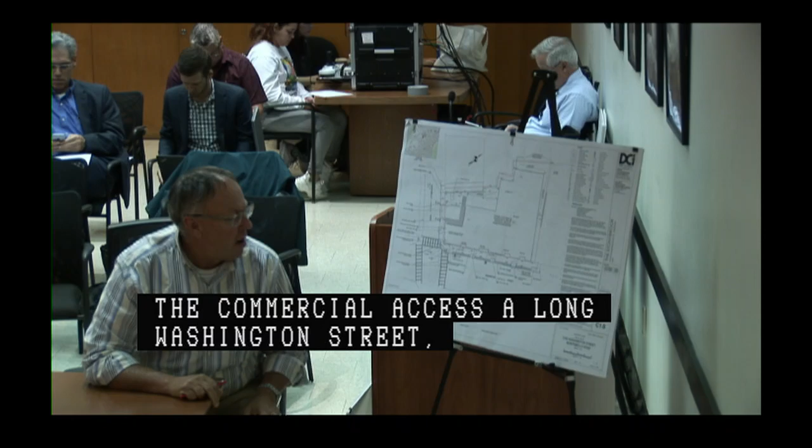The overall project itself is a redevelopment, 46 residential units with commercial on the ground level. There's entrances to the commercial access along Washington Street. There was originally a curb cut on Washington that was closed. So all access to the underground parking is off of Montebello now, from this area here.

In that area where the curb cut was closed, we're providing tree planting with a tree well. There's existing trees where the tree wells will be improved. There is a permeable paver strip along the curb line, back of the curb line. The sidewalks will all be constructed in front of the building.

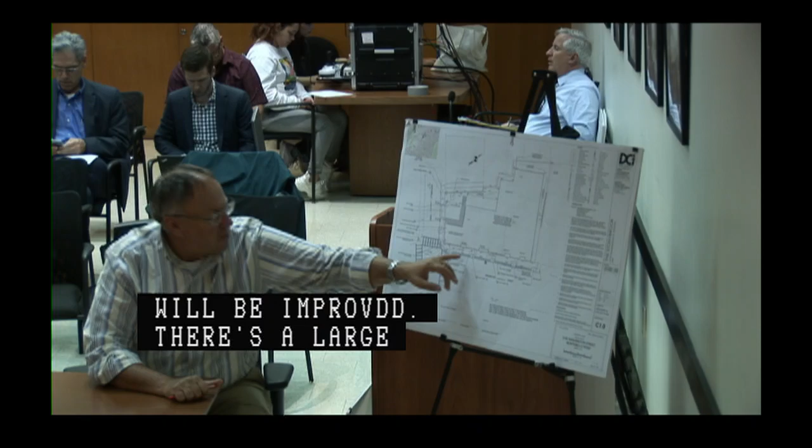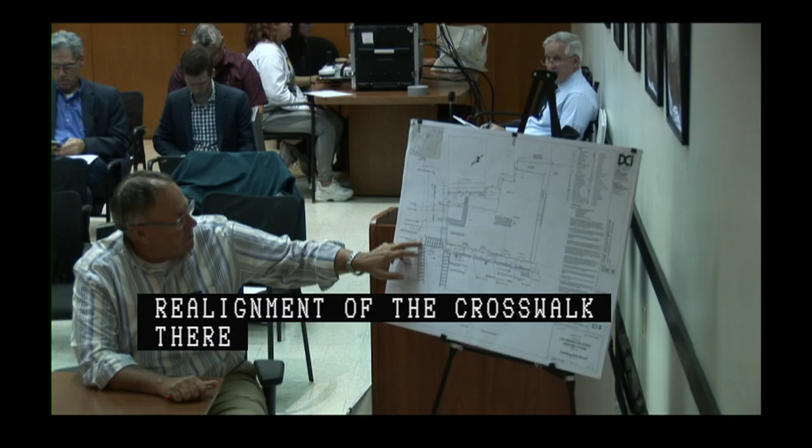At this intersection here, there was an apex ramp. We were asked to separate those, and those have been separated. There's a slight realignment of the crosswalk there to be restriped. The reciprocal ramp here was just recently done with a tactile warning strip, tactile warning pad, and new concrete there.

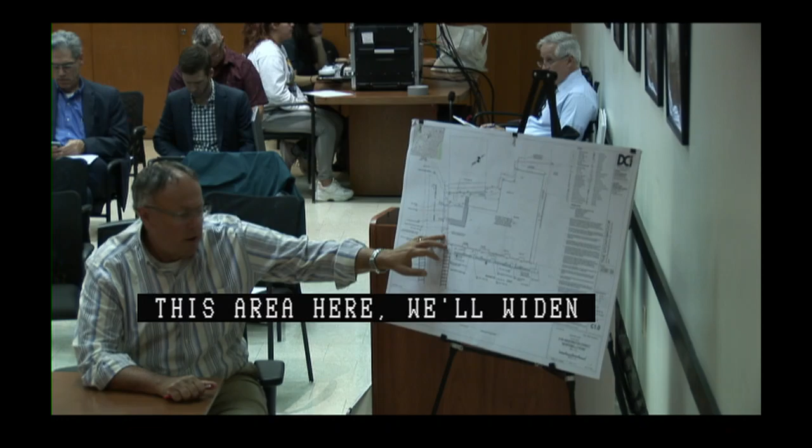This area here, we're widening the sidewalk on Montebello with a new tree planted. BPDA wanted some additional planting, so we're providing a tree here. We're maintaining the 5-foot pedestrian full width behind that tree well, with a 14-foot wide curb cut at this location. And then we match the sidewalk at the property line, on the northwest end of the project site. I think that basically covers the improvements that we're proposing.

Is there an LMI for this? I'm sorry, is there an LMI for this? Yes, there is. There will be. Okay.

Just to confirm, with the existing signal equipment and splitting from the ramps on the corner, there's no conflict with the existing signal equipment with the new ramp locations? So actually, right at this location at the end of the ramp, that's where the mast is, or the ped head is. So there's no encroachment within the threshold? There's no encroachment within the threshold.

Other questions or comments on this specific repair plan? The tree pits, are you putting a tree grate over the tree pit, or is it just an open pit? Open pit. Okay, so you need to ensure, because of the LMI, that it doesn't become a tripping hazard.

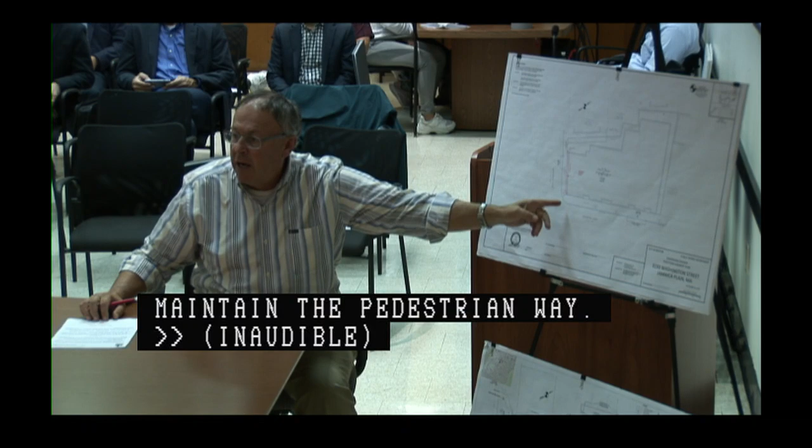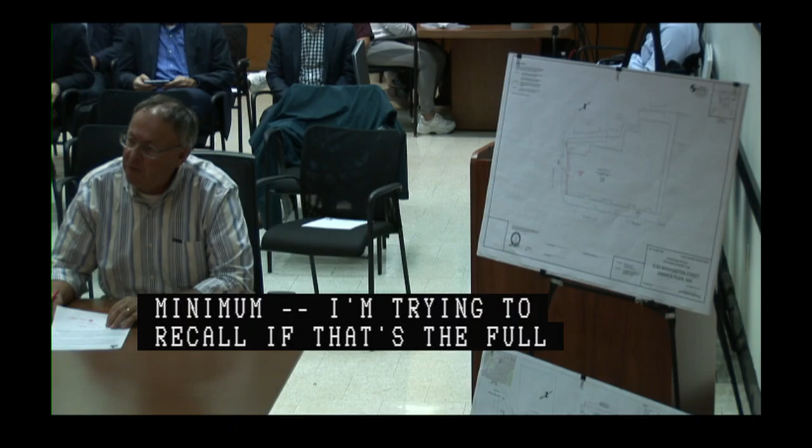Is there any foundation elements of your buildings that comes underneath the easement area? The footing at this, I imagine, is well below grade. The footing may jog out, probably about 12 inches at a minimum. I'm trying to recall if that's a full depth foundation or just at grade, but you'd have a frost wall. So at 3 or 4 feet below grade, the footing might step out a smidge.

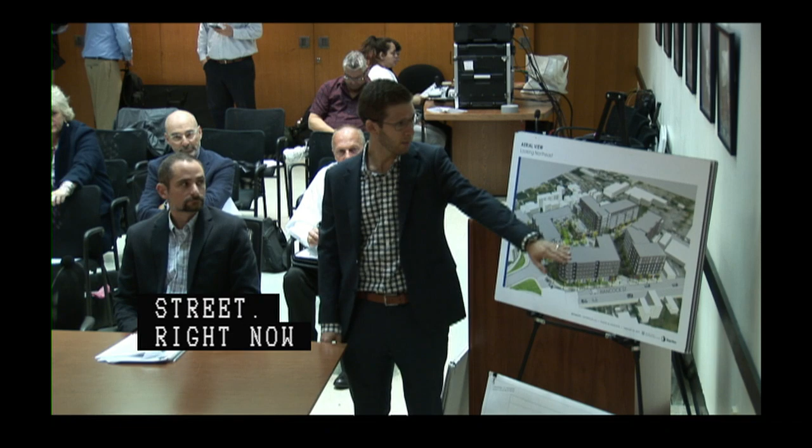As Rebecca mentioned, this is currently a vacant lot. It fronts Dorchester Avenue, Hancock Street, Pleasant Street, and Greenmount. This is 4 buildings comprising a total of 488 units. It has internal drives as well, with a right turn only from Dorchester Avenue and a 2-way drive connecting Hancock around to Pleasant Street. The pieces we'll be talking about today are mostly along Hancock Street and Dorchester Avenue. There are retail spaces along Dorchester Ave and Hancock Street, as well as a little at the intersection of Pleasant and Hancock.

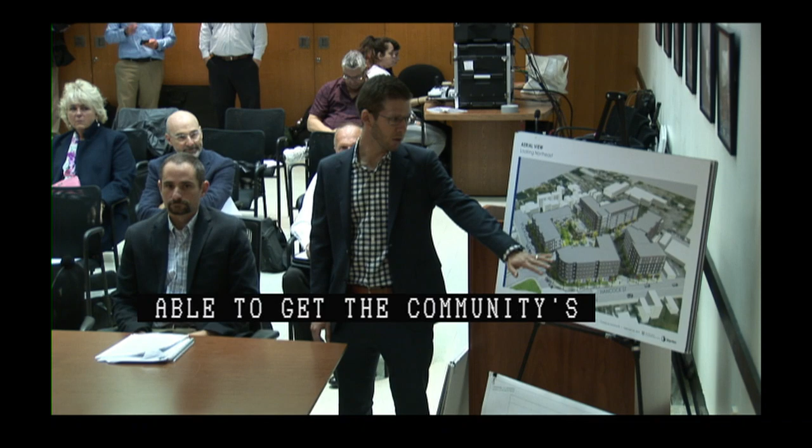For today's record, can you add a couple of sentences as to the community process you have engaged in? I'm sure it's been vibrant and extensive, just a few words on that. Yeah, definitely. We spent months with, I think, over 30 meetings with different community groups from Savin Hill Civic Association, Meeting House Hill, Jones Hill, and Glen Point. We've been able to listen to the community's input and incorporate things such as a community room. We've made a point to really incorporate green space and the pedestrian experience to fit in with the community, and I think they've been very happy with how this has turned out.

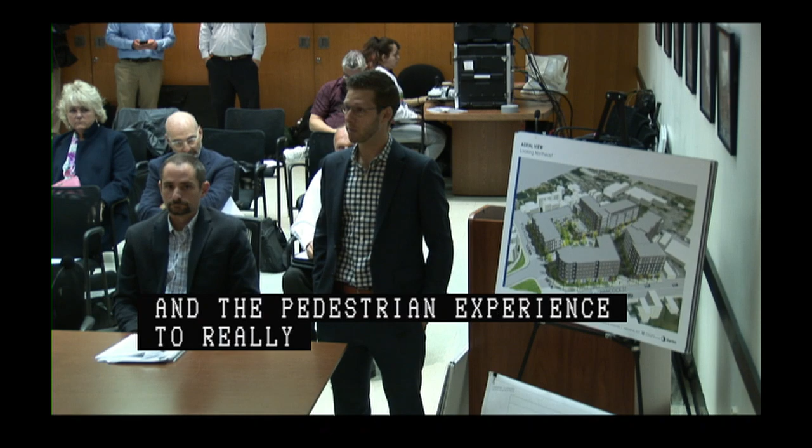Other general questions before getting to the widening relocation? No, let's move to the widening relocation.

The first petition is on the Dorchester Ave widening. There would be an easement granted from the building face to the property line, which is 10 feet in width, and would allow for the future widening of Dorchester Avenue. This is a highway easement, not a pedestrian easement.

Questions or comments on this? Todd? All set. Members of the public?

All right, I'll entertain a motion on the widening and relocation. I'll make a motion to approve the petition by Winter Gold LLC for the widening and relocation of the existing right-of-way lines at Dorchester Avenue, as entered in the record by the chair and as shown in the set of plans entitled City of Boston Public Works Department, Engineering Division, Widening Relocation Plan, dot block, Dorchester Avenue, Dorchester, one sheet dated September 6, 2019. All in favor?

Aye. So moved. Moving on to our next item, a petition by Winter Gold LLC for the acceptance of pedestrian easements adjacent to the following public ways in Dorchester: Hancock Street on its northeasterly side, generally between Dorchester Avenue and Pleasant Street / Downer Square; Pleasant Street on its easterly side, generally between Greenmount Street and Hancock Street, Downer Square; and Greenmount Street on its southwesterly side, southeast of Pleasant Street.

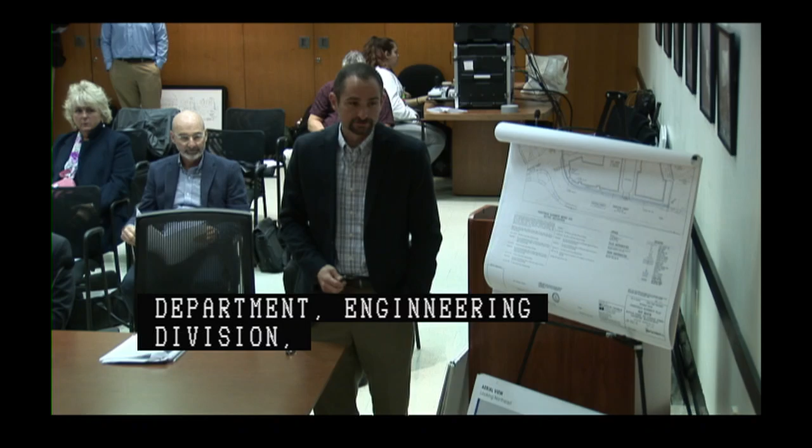Again, Jeff Halberg, representing Winter Gold LLC for the dot block project. The pedestrian easement here is located along Hancock Street, turning the corner towards Pleasant. Again, this is to allow future movements along this stretch. There are 3 sheets associated with this improvement, going from Hancock to Pleasant Street, turning the corner. It's a variable width, so it allows for adequate space as the curb line moves, and then it turns to Greenmount as well along the stretch here.

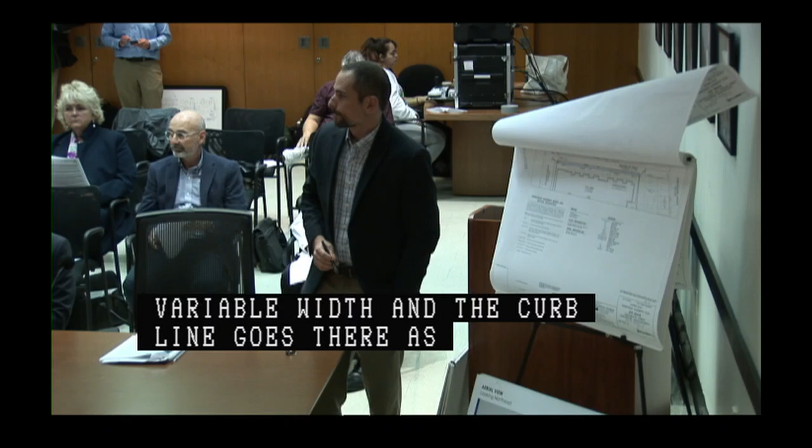All of the buildings have been set back from the property line. This is a formerly industrial commercial site, so to allow for a much more pleasant pedestrian experience, recognizing that this block is a transition block that will be a place-making location in terms of new residential, all the streetscapes envelop the entire building. We've arranged, in collaboration with BTD, Public Works, PIC staff, and BPDA, for the widening of the sidewalks all around the property.

And those get to the specific repairs, but what's going to be the resulting sidewalk width around the property, and how much will be sort of more for landscaping and furnishing? It'll be a 6-foot wide sidewalk, 10 feet total including the furnishing zone and curb line. So 3.5 feet for the furnishing zone, 6 inches for the curb line, plus the sidewalk.

Are there any activities on your ground floor that might require more of a commercial nature, like a restaurant type, or sidewalk access? Not on Greenmount Street, no. Greenmount is more of a residential neighborhood. Hancock will have it, but it'll be within the Dorchester Avenue property line. The building on Hancock Street is set far enough away from Hancock Street that if there's a cafe zone, it'll be on the private property.

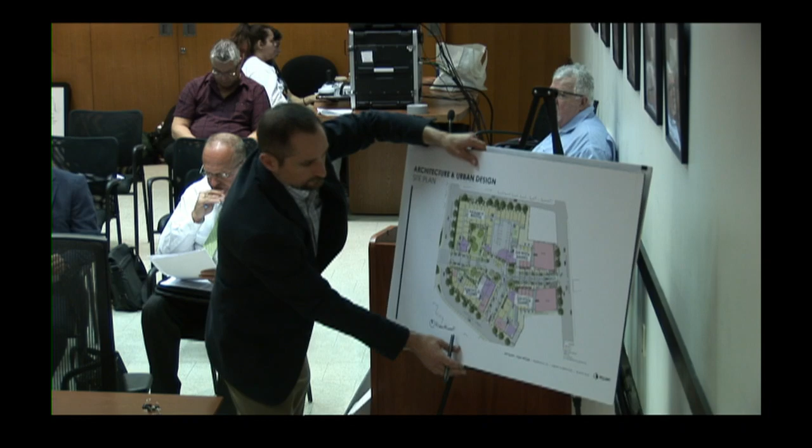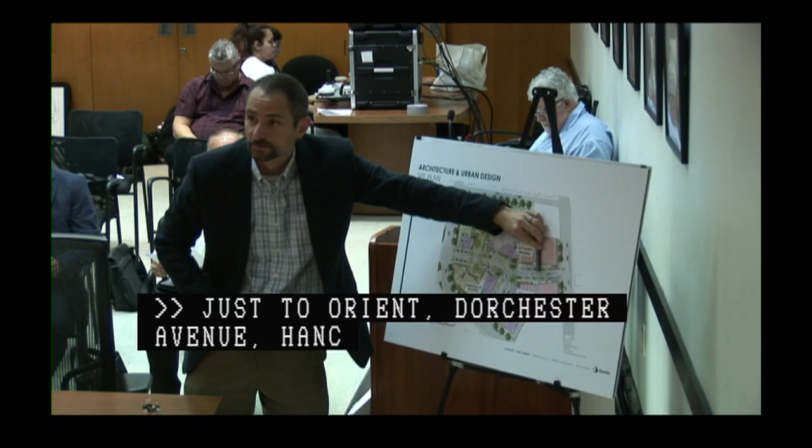So internal to the site, just to orient, Dorchester Ave along this side here, Greenmount, Pleasant, Hancock. The passageways, sidewalks run along with the interior access roadways. We have this one-way in. We're calling this the Downer area, which will be a plaza that's pedestrian-friendly. Cars are welcome or permitted, but it's more for... give me a second.

Todd, are those private property? Private properties, their driveways, they are not laid out or anything, but you will have people coming out. I mean, these are pedestrian paths, right? Yes, correct, they will be properly lit, all the lighting standards. But the key is that while cars can make a right turn in, they will not be able to exit the site onto Dorchester Avenue, and that will limit the number of vehicles that will actually use that. But there are generous sidewalks on either side of the cartway on that private drive that comes off of Dorchester Avenue, and there is street lighting. The buildings will also have some external lighting as well.

From a public transportation perspective, especially whichever street that is going north-south, is there a bus stop on the other side which will cause people to cross that location? Well, there's a signalized intersection located here at where Hancock meets Dorchester Ave. But if I ask you where's the closest bus stop, where is the bus stop?

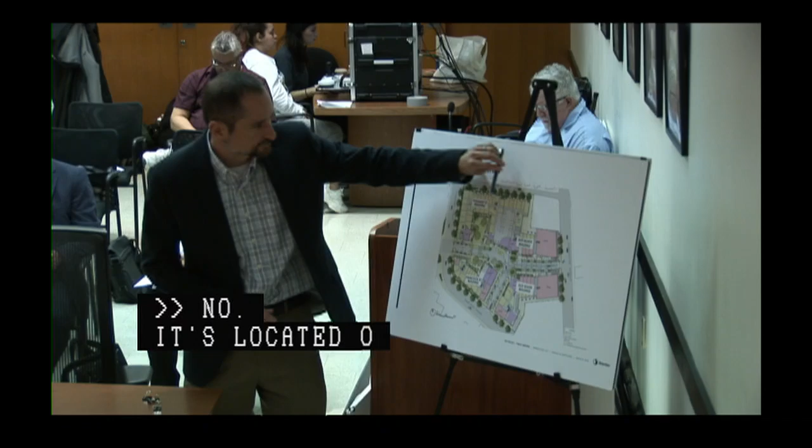One of the questions I also have with that plan, the loading for the five buildings, will that be done in the internal cartways? Not all the loading, no. There's loading located off of Hancock Street, and we also have some off of Greenmount. But it's on the property, yes, the loading would be occurring on the property, so nothing is occurring on the street. Thank you.

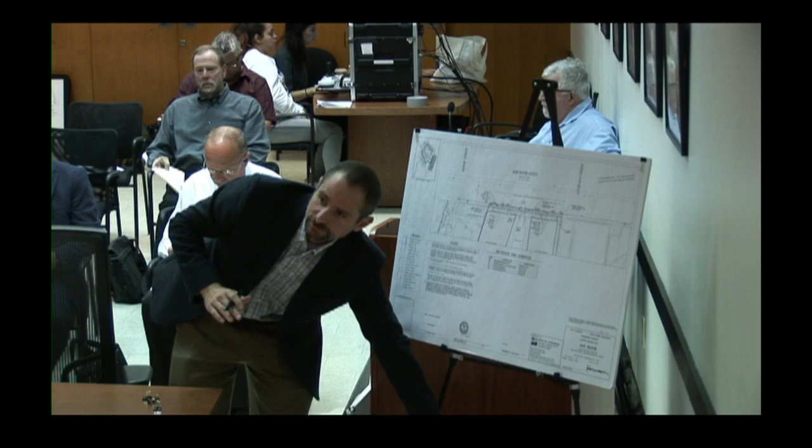And we went into this last time, but it is a flush sort of sidewalk condition on Dot Ave, is that right, for pedestrians walking? Yes, for pedestrians walking in the direction of travel. Right, it would be a flush condition, correct?

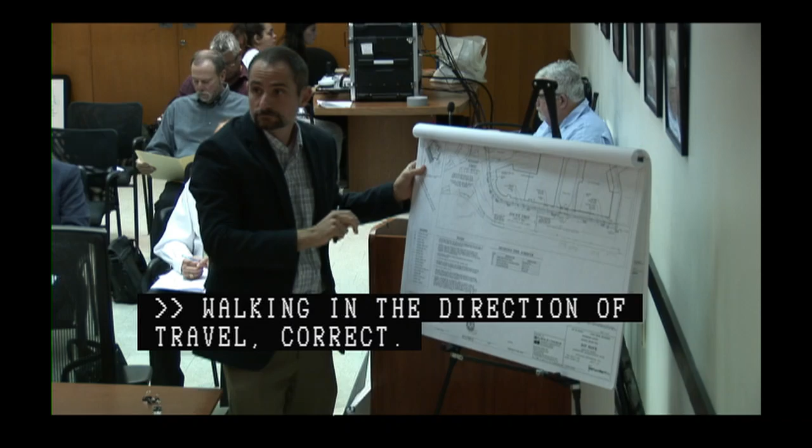What about the street light fixtures, have you thought about that? Yeah, is it going through the same old stuff that might be there, or have they coordinated all that, including the types, with the street lighting division?

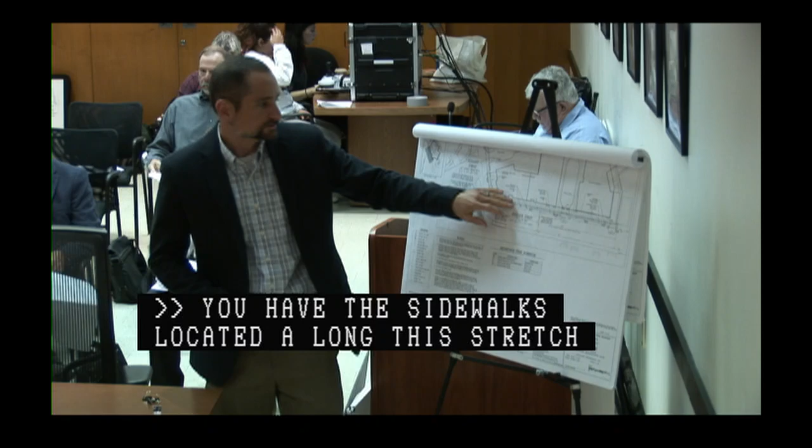On Hancock, we have similar specific repairs. We have concrete sidewalks located along this stretch, along with granite curbing, bike racks, and treatments as well. This same condition occurs as you wrap the corner, where we have accessible curb ramps located along.

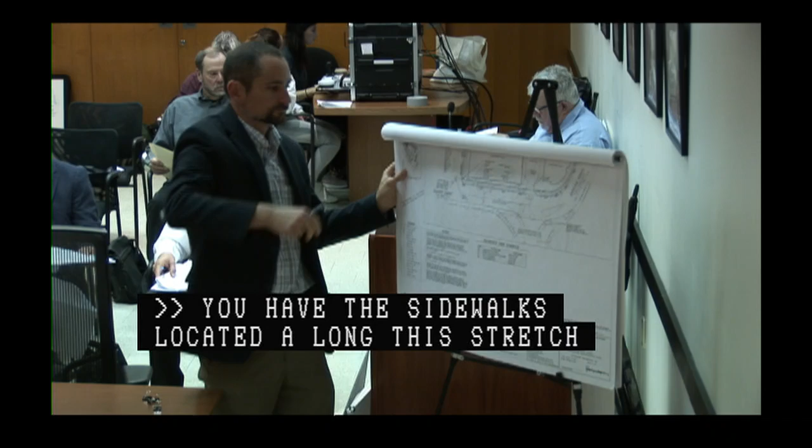Continuing across, now we're heading to Greenmount. Greenmount is a little bit of a different condition than on Pleasant and Hancock, in that the streetscape will actually be on private property. They won't be within the public way, so that's not included on the specific repairs.

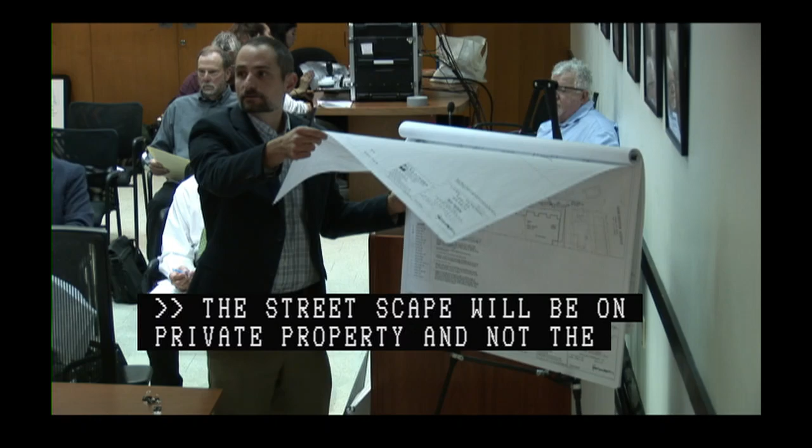Sorry, quick question, Mitch. So it's also a flush sort of entrance off of Hancock Street, but if I recall correctly, not off of Pleasant. That's correct. So at this location, it is not a flush curb condition as you're in the path of travel. So there's a ramp though, pedestrian ramps that go across that. Exactly, yes.

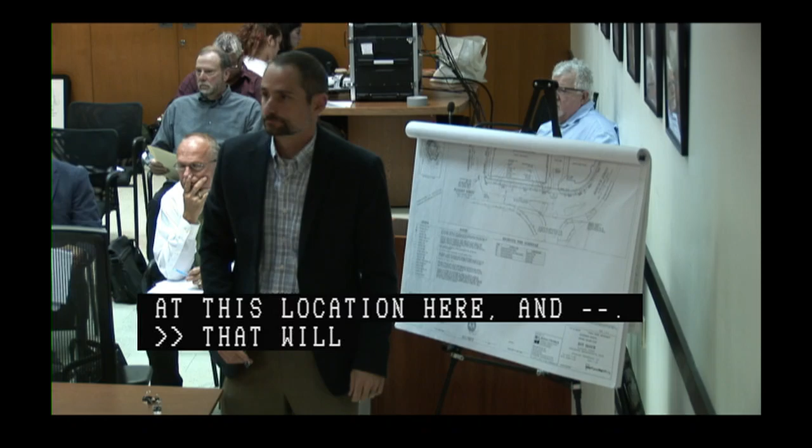On Greenmount, we have streetlights, concrete curb, granite curbing, concrete sidewalks, and then the street trees are pushed off.

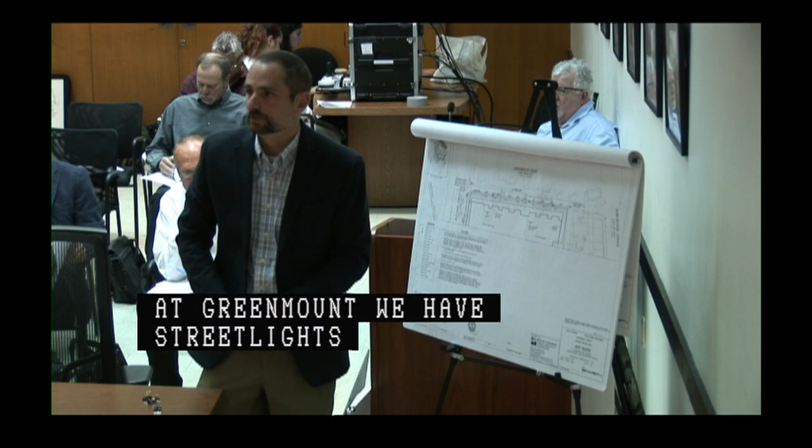Can you walk us through the work you're doing to bring out the curb line at Pleasant and the western entrance to your property, on the opposite side of your property?

So this hasn't been fully designed yet, we're showing it on the plan. We're showing these bump outs to create a more channelized intersection. This will be a signalized intersection, and for that reason we are continuing this sidewalk with an accessible curb ramp on both sides to allow for pedestrian travel.

That's a future action. The status of design is that 25% design comments were provided. The 75% design is underway and expected to be submitted to BTD by the end of November for review by the new director of engineering at BTD. So we will be before you on PIC actions depending on the final completion of city review and agreement as to how the public sidewalk should work, and we will be before you both for specific repairs and a related maintenance agreement to maintain those areas, whether green or hardscape.

Great. Rebecca, that future traffic signal, is it going to be installed by you? The proponent, yeah, it is a mitigation obligation we inherited as part of acquiring the project site. It was the city's decision to have a signalized intersection; there were some earlier discussions about a roundabout. It's being designed by HSH, it's embedded in the TAPA under BTD review, and it's our obligation to get that constructed and operating and come online by the time the project is open for occupancy. Then the signal will be owned and operated by BTD.

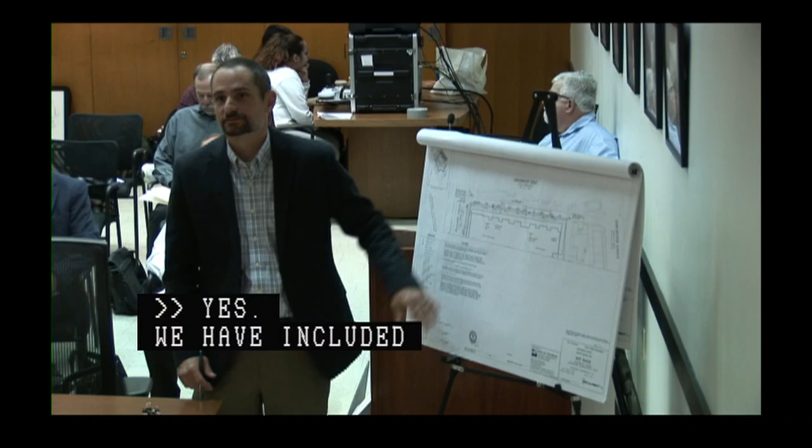We also want to reiterate, as brought up at the last meeting, that there's a 72-inch pipe within the limit of work, and we have the right to be there at any time if something happens. Yes, we've included the location of that on this plan, showing the 72-inch line throughout the site. There's also an easement agreement being reviewed by Jim Seincross that addresses that drain pipe and your rights of access to it.

Thank you. You're welcome, Miss Lee, sorry, Rebecca. All your support utilities that are needed, telecommunications, I will get to the telecoms later.

So all your water, sewer, gas, juice, all of those things - do you have understandings with the various utility companies to supply those needs, or are they supposed to upgrade their stuff to provide feeds to you? Let's just take gas - National Grid, I'm assuming, in this part of the city. Have you had conversations with them about supplying your needs? Because sometimes these conversations aren't complementary, and these utility companies come at the 11th hour, before or after you're done, or somewhere in between, to dig up our streets, and then our streets get torn up trying to serve you, which puts us in an awkward position. So do we have an understanding of where you're getting all your utility connections?

These are our standard stuff. This is an underground district, so there better not be any overhead wires. Are there? Got it, okay.

So the other challenge is all the telecommunication companies who may suddenly want to give 5G service to your area. What is the level of interaction with those entities? Have you had conversations with them? Absolutely, yes. We've been coordinating with utility companies for probably almost a year now on locations and demands. We have will-serve letters from them, because it would be very problematic if there are multiple ways of providing access to you versus them saying they're trying to support a 500 unit development project and then digging up half a mile of streets just to get you a lateral connection. Yes, and we've been discussing pull-off locations for gas and communications to limit disruption within Dorchester Ave as well, so we've been having these conversations with the companies.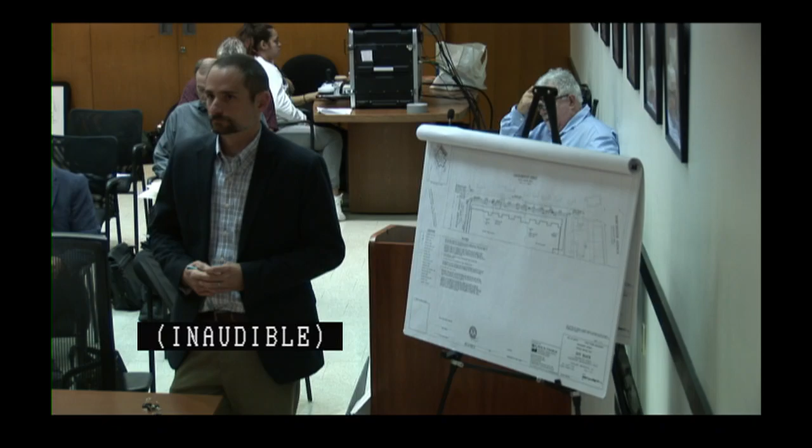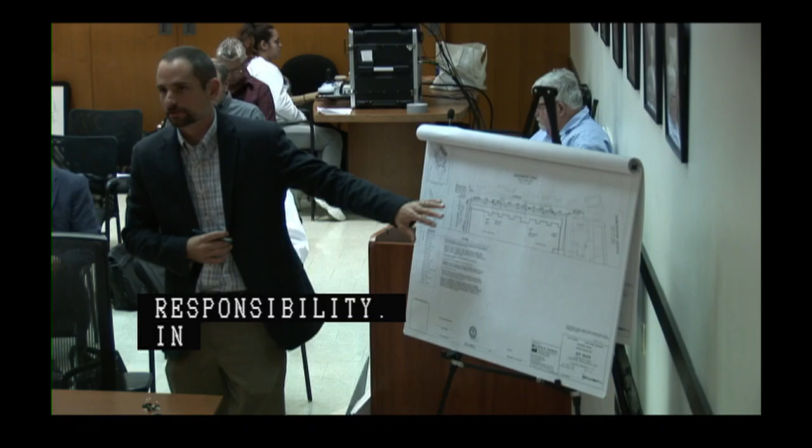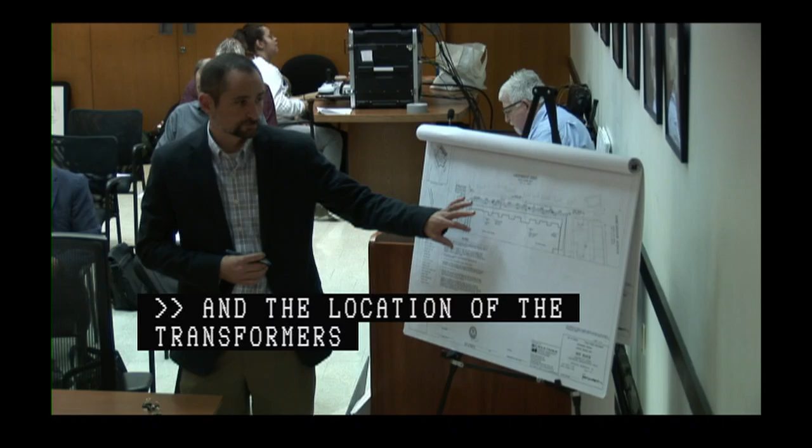How about Eversource? Are you building any of their infrastructure, or will it be your infrastructure as part of the power requirements of the building? Normally, they will be building the infrastructure to the transformer. It's our responsibility to take that power from that point, and interior to the site, we would be installing all of that. And the location of the transformer - sometimes we get tagged with putting the transformer on city property. We're showing our transformer locations within the interior of the site, all within the interior.

So that brings up Para's point - a lot of the coordination issues that become a real headache are the utilities as they pertain to the construction management plan, the temporary power, permanent power, gas. That needs to be figured out in your CMP, because I'm not going to allow that activity amongst the active construction work site taking place on the city right of way. Right, and when I said they're doing work, I mean they would be pulling the wires, and we would be doing the installation of the conduits.

Yes, they own it. So in response to this back and forth, we can revisit with each utility company their construction timing, scheduling, and staging, and revisit our CMP to make sure that's anticipated within what we're showing. If there are deviations requiring street openings, we'll show and discuss that when we discuss a revised CMP. So we'll literally go back to the drawing boards and figure that all out.

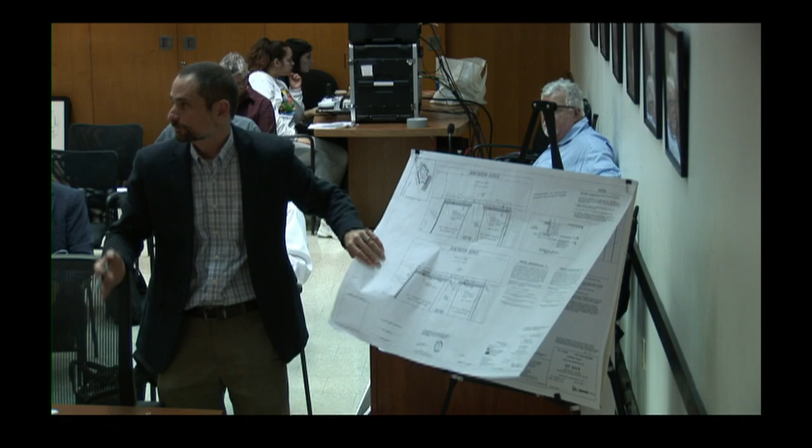So we're showing here the location of that easement that we're granting and then the vertical discontinuance for this footing. In addition to this, as a comment, we received word that the architectural trim located on the building itself does project out within this area. And so the current thing we were showing on the projection plan, upon further discussion, should be shown on this plan instead.

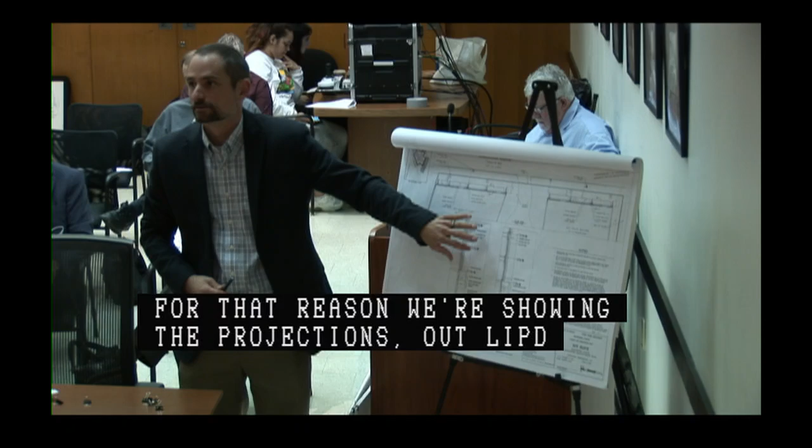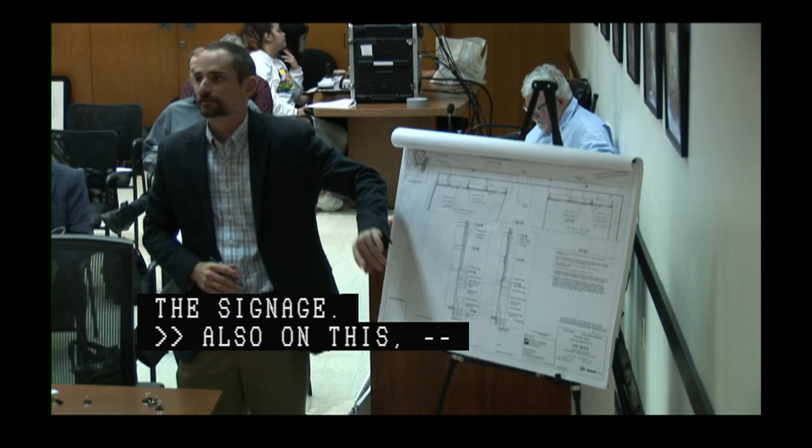Jeff, also on this, or at least on what we're seeing, the facade trim, correct me if I'm wrong, we are moving. Correct, so it will be deleted from here, the architectural trim will be deleted from this plan and inserted onto the vertical discontinuance.

Questions or comments on the projection license? Again, for the record, Greg, you work for Samuels Associates? Yes. What's your relationship with the developer? We are the developer. The owner is Winter Gold LLC, so we are developing for the ownership of Winter Gold. And we have them on record as being the representative for the developer? Yes, and we have signed petitions by Winter Gold LLC.

Okay, thank you. Could you put that up, just want to get a little understanding of the awnings you're proposing, what height, what length, what depth? The awnings. Yep, the picture of the awnings.

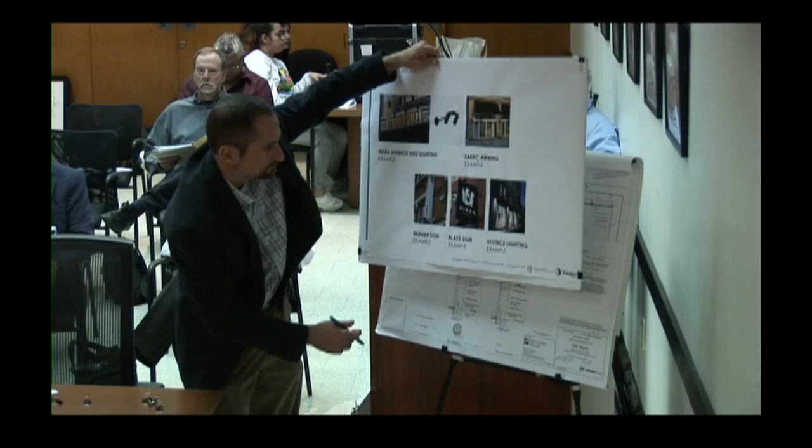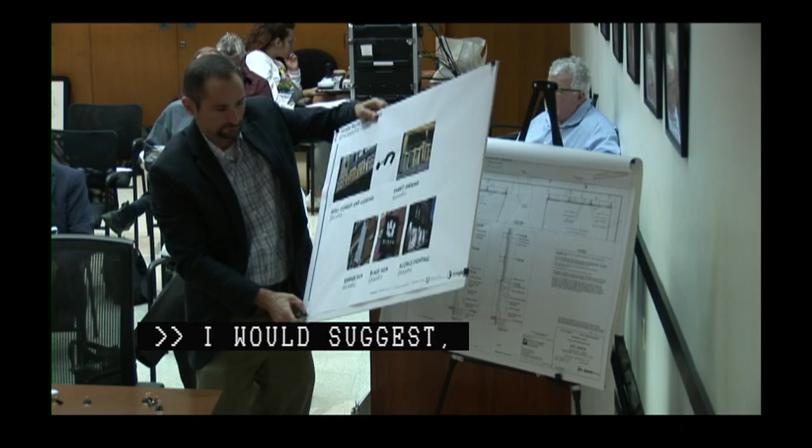I would suggest fabric awnings, that's about it, but beyond that, at the moment, Jeff, maybe put up the image in the package, the Dorchester Avenue corridor image, that's where the money shots are. Exactly, we have an image of that shot, what we are proposing. Correct, not taking 10 steps backwards.

Exactly. So facing. Yeah, obviously we don't have the identified tenants at the moment, and the notion here is that we'd like to give the tenants some flexibility within bounds to identify themselves and also unify the project across the ground plane and the first 15 feet or so. The awnings would be intended to be between the piers, and then at the piers, the notion of maybe blade signs and other kinds of identity and lighting, sconces along the wall, things that make retail corridors friendly, well-lit, and safe.

Right, so as long as there's an understanding that we are not giving you carte blanche, a blank sheet, as to the type of verbiage and signage that can be there, okay? Because you are giving us very general kind of requests, and we want to be mindful.

This action is really just identifying the locations and dimensions of the building projections, and the project understands that they're going to have to go through actual design review for these projections once tenants have been identified. Who takes care of it? Is it BPDA? Yeah, okay. So BPDA through the buildings department will sort that out? That's correct.

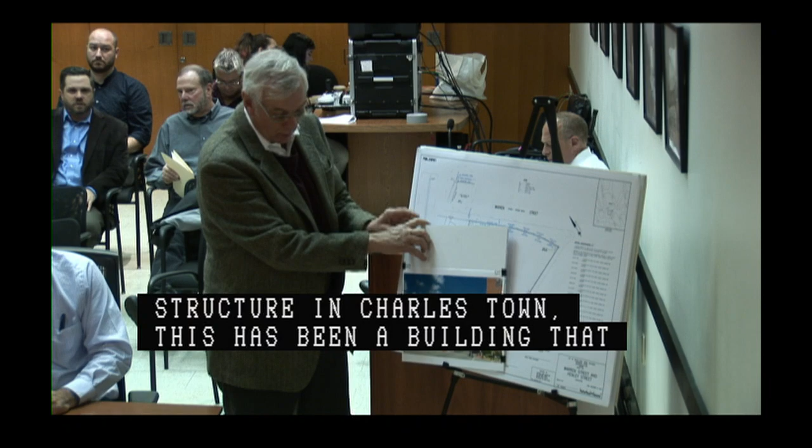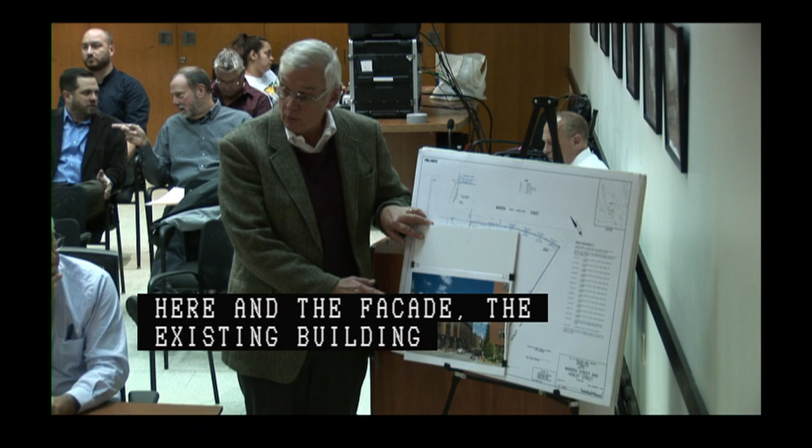This is the renovation of an existing structure in Charlestown, close to City Square. This building has not had a lot of improvements for many years. It was built as a parking garage in 2 phases around 1920, and the renovation is to the interiors to create additional office space, as well as to add a 4th floor. For the facade, the existing building is a poured-in-place concrete parking garage, which was built right on the property line, the street line, at the back of the sidewalk.

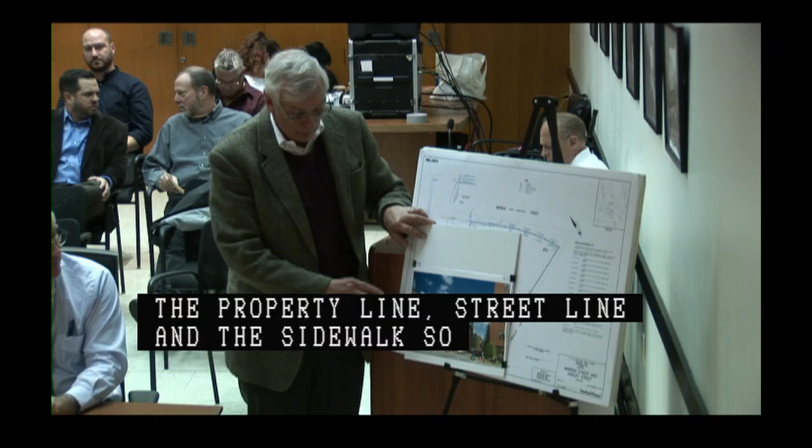So to install the new brick facade to blend with the rest of the City Square Charlestown neighborhood, we're requesting that a small permanent strip of land along the Henley Street side and the Warren Street side be dedicated to this property so that the facade can go down to the ground in front of the existing building.

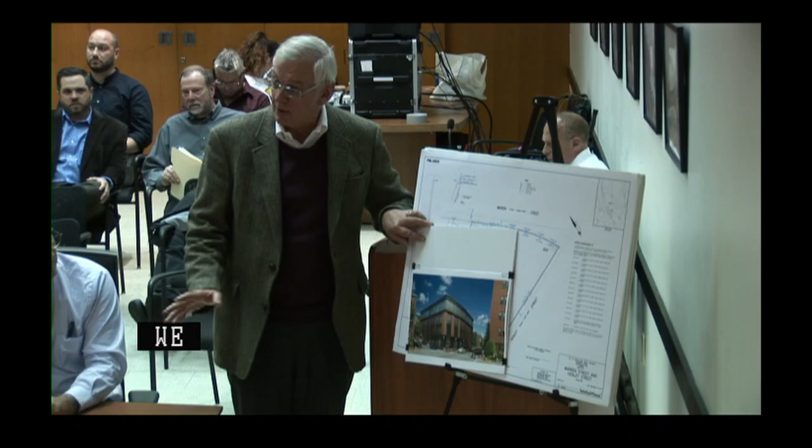Got it, that's really the overview of the building itself. In terms of the street improvements or specific repairs, we're maintaining the brick sidewalk along Warren Street, and the concrete sidewalk along Henley Street on the slope. We're also maintaining all of the existing street lights. We're not adding any landscaping or other street improvements to the project.

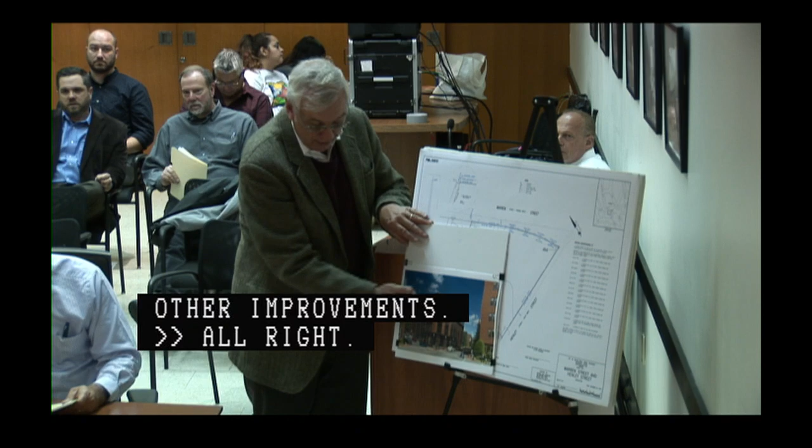Right, and I apologize, Mike, what is the current use and what will the future use be? Current use was a mix of office space on the 3rd floor, parking garage on the 1st and 2nd floors, and some retail. The new building will still have those same uses, but with more office space. Parking garage will just be on the 1st floor, and the retail area will be expanded at the corner of the 2 streets.

Do you want to walk us through the actions?

The first issue is associated with the discontinuance related to the building facade. It would be 0.75 feet along the Warren Street frontage and about 0.35 feet along Henley Street. The area totals about 136 square feet.

Is this a surface or a subsurface discontinuance? Surface. So there's a surface discontinuance for the building facade, and they also have additional aerial vertical discontinuances for building projections.

Reason? So you're basically taking 3/4 of a foot off our sidewalk. Yes. For what purpose? Because this building is there and you want to improve the facade, since sidewalk widths are not the greatest in Charlestown, challenged as it is right now. As Mr. Vidal mentioned, it's to improve the facade of the building so it has continuity with the existing City Square buildings.

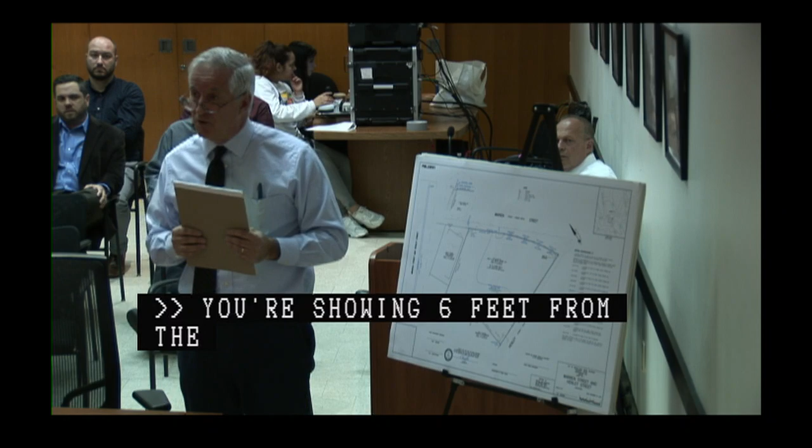On the specific repair plan, you're showing 6 feet from the curb edge to the building face. Is that after the discontinuance? That's after, yes. You'll have a minimum 6-foot width along Warren Street after the building facade is installed. And you're proposing removing about 3/4 of a foot on Warren Street, just on that side. On the Henley Street side, it's much less - that sidewalk is narrow to begin with.

So is the city council involved? The value of the discontinuance - the petitioner owns the fee in this land, so there's no BPDA taking. However, they are going to conduct an appraisal, and they will be compensating the city for the discontinuances. They've been working on that appraisal, and it's close to being done, is my understanding.

Other questions on the discontinuance? I just have a question - recently, as of this past week, there's been some Eversource transformer work. Is that part of your project? As far as off of Henley Street, there's some transformer work going on to relocate and put in a new transformer. Is that for the building? It's part of this building, yes, because of the renovations going on. Eversource said they wanted to put in a new transformer.

The previous transformer was put in in the 1980s when just the third floor was office space. And that's on your property? No, it's an easement on the neighboring property, and it's also connected to the neighboring building, so it's not just serving this building, it's serving the neighboring building as well. So, just do me a favor, let Eversource know they're not working under your permit - they need to pull their own permit for that work. Specifically, I think we're going to have a crane out there this weekend, so that needs to be pulled. All right? Yes, thanks.

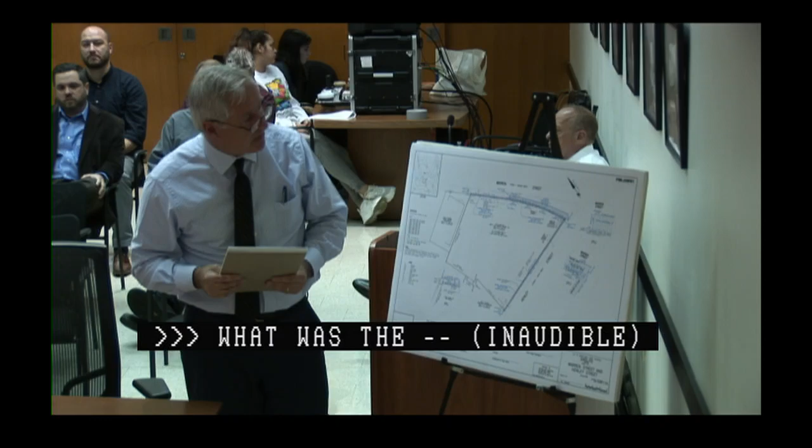It's identified as a width of - I'm sorry sir, I'm having difficulty hearing you. I'm sorry, you were saying it's for a roof cornice - so these, you're speaking of the discontinuances. Yep, my apologies. Yeah, it's about a foot in width along Warren Street and Henley Street, at the roof level. Totals about 312 square feet in area.

This is further discontinuance B, proposed for a canopy along Warren Street that turns the corner on Henley Street. Along Warren Street, it's 4 feet in width, the canopy, and along Henley Street, it's 1 foot. That discontinuance totals about 436 square feet.

The resulting sidewalk width is going to be 6 feet - you're going to have 4 and change be a canopy. How does that line up with our standards? So our typical maximum is 2/3 the width of the sidewalk. At what height? So it is 12 feet above - about 12 and a half feet above the sidewalk level. At the lowest point, it's a little over 10 feet at the upper part of Henley Street, but that's only a 1 foot projection, only the short section.

This street is sloping down. So on the plan you have there, it's showing, on the northeast corner, that it comes out about 4 feet - sorry, to your left, closer to you. This side? You got it. So that's looking at about 4 feet and 4 inches, roughly, which would be going beyond the 2/3. It's 4 feet - the sidewalk itself is much wider along part of Warren Street. Okay, so we're looking at less than 2/3 at any point.

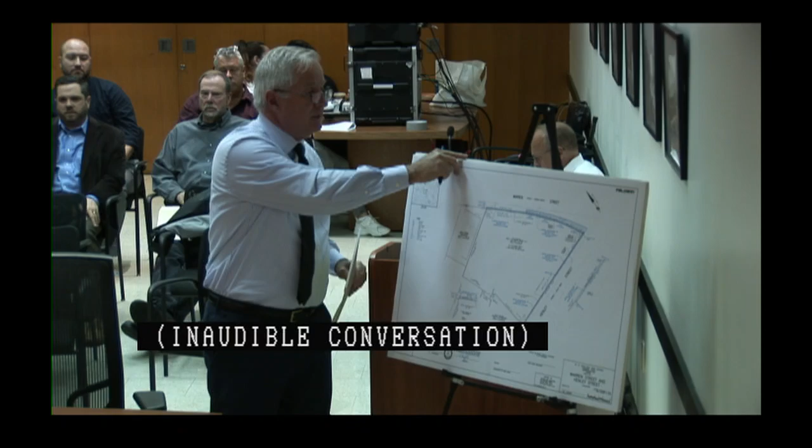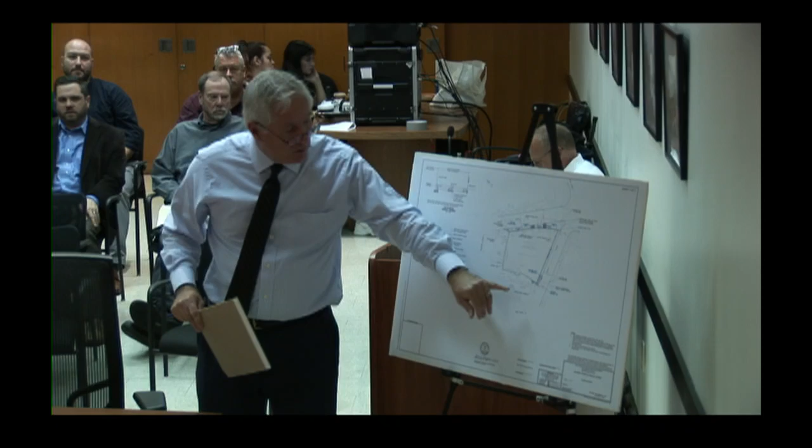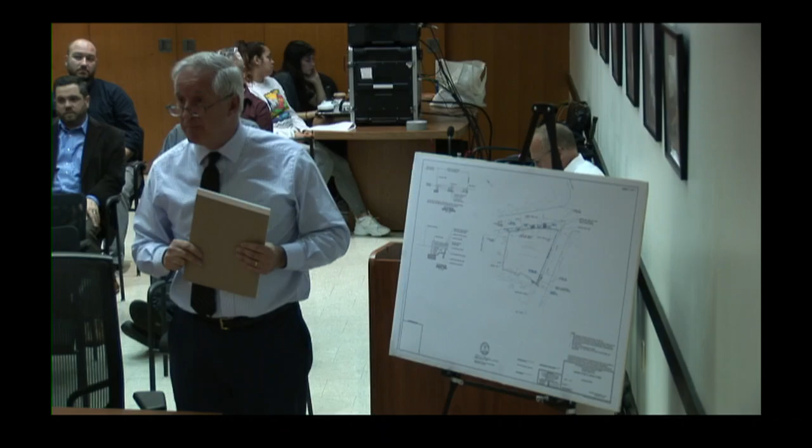Hopefully I'm not overstating the situation, but I am of the opinion - I may be wrong - that by the time you do this wonderful project, the sidewalks around your building are going to get impacted in an awkward way. So it may be in your best interest to plan on rebuilding the whole sidewalk, unless that's what you're already saying and I'm just not hearing it. Are you rebuilding the whole sidewalks?

No, we weren't. I am fairly certain that your contractor - not you, sir - may have difficulty hopscotching and not disturbing the whole sidewalk. So it might be in your best interest to do what is sensible, because there will be damage by your contractor to our sidewalks by the time you build that wonderful project. It might be useful for you to plan ahead, assuming the whole sidewalk needs to be rebuilt.

That's one. Two, as far as what the materials are, the city team will give you guidance, because some parts of our city fall under historic neighborhoods - historic commissions, historic districts - and they will tell us whether it's going to be brick, concrete, or whatever it is. So we will give you that guidance.

It may be a better step on your part to follow up on that with the commissioner on the construction management plan, because the building is zero lot line - we've closed all the sidewalks, all the crane work, all the lift work is off the public sidewalks and roadway. More to the commissioner's request.

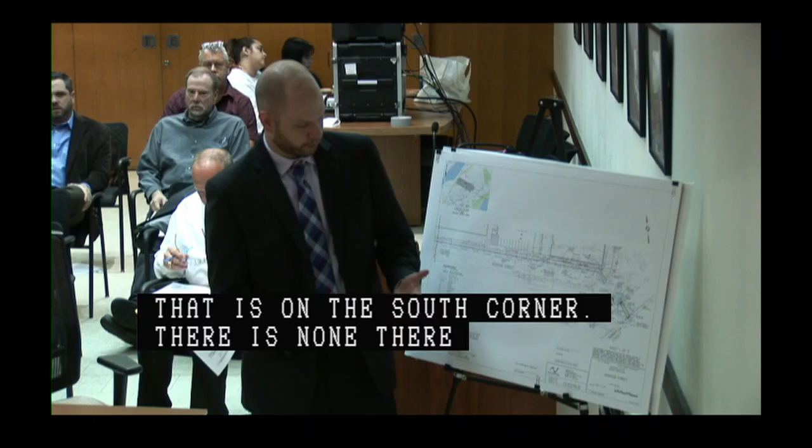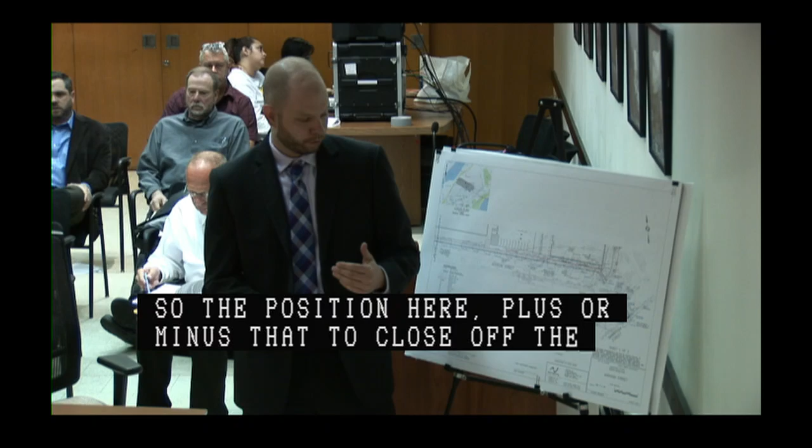So the proposed condition here is basically to put in the raised crosswalk. We'll add a 6-inch curb, plus or minus, around those corners to close off the existing apex ramps. And then we want to provide a better crossing, an apex ramp across Saratoga Street.

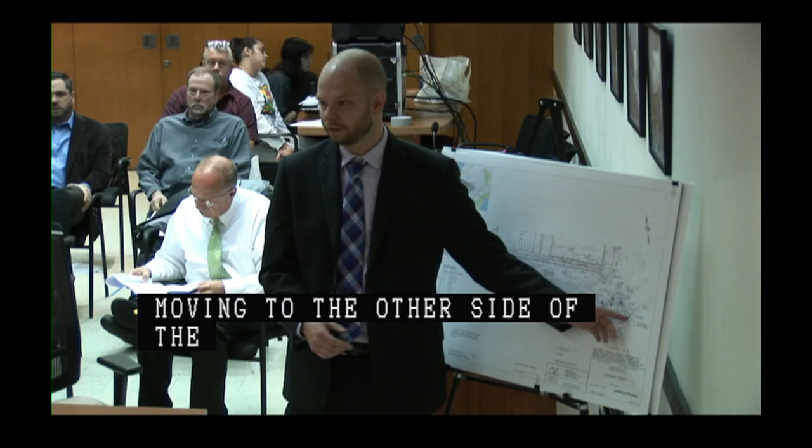So we can't provide that on the south side because of the existing catch basin - the ramp would be right on top of it. So we're proposing to move it to the other side of the street, maintain the single crossing, and that way we can get a straight ramp going across, and add a new reciprocal ramp on the other side. Got it. Sorry, Chris, I know you just said this, but you'll basically still have only one crossing of Saratoga.

You're just moving it from the southern side to the northern side. Yes. And you're going through a community process around that as well - that's part of the overall community conversation. Yeah.

So then, moving westward along Addison Street, this is our project site, kind of sandwiched in the middle. The edge of our site is right here on this page. So in front of our site, there's a large 37-foot driveway existing.

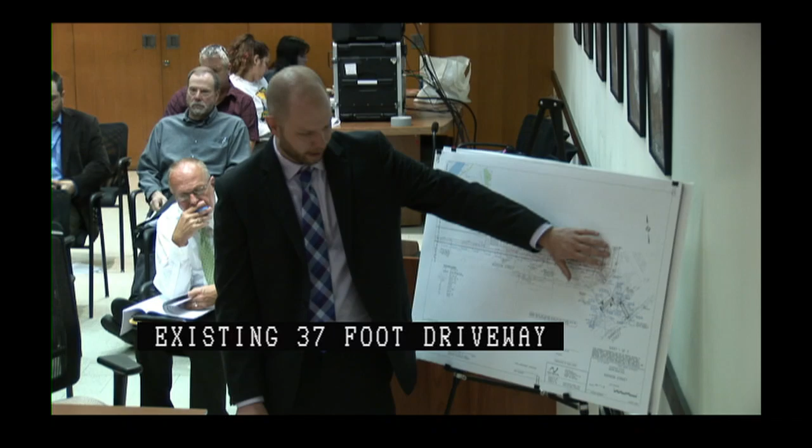We're proposing to close that and put in a new vertical granite curb. There are also residences on Saratoga Street that currently have access to a driveway which runs through our parcel and ends at a curb with a field, basically. So we're going to formalize that with a 20-foot curb cut, which will provide fire access both for some of the units back there and our building.

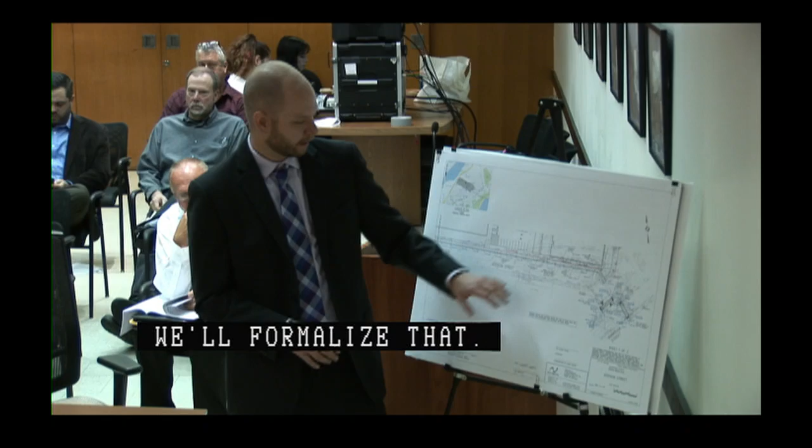There will also be a new curb cut for access to the motor court drop-off area for our project, approximately 21.7 feet. And then at the request of the Facilities Commission, we've widened the sidewalk a bit in front of the site to maintain 7-foot width, which required a small pedestrian easement to make that happen.

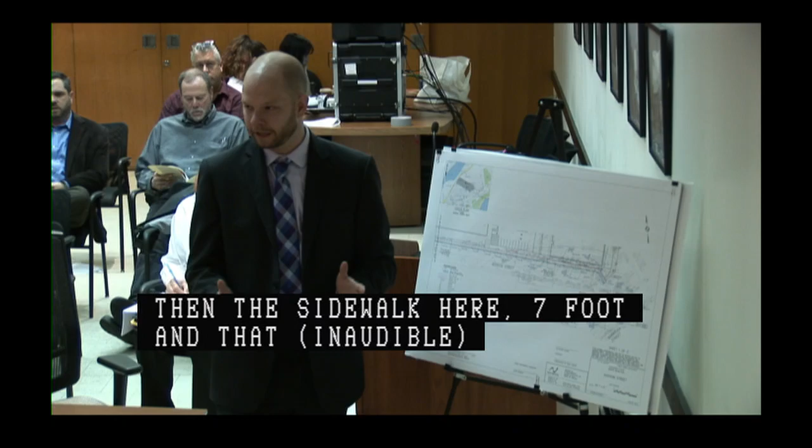Moving westward towards Route 1A, Holland Highway, it's pretty simple. We're just going to replace the sidewalk in kind, same cement concrete, and then level it out where needed.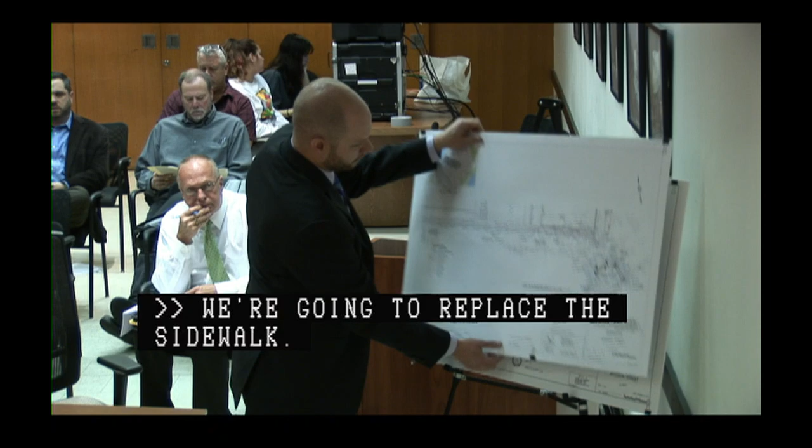No street trees today, no lighting today. There's an existing street tree that's just going to be maintained. It's on sheet 2. There's one, that is right here.

You're not proposing any additional street trees along Madison Street now? Is there not the space to, or is it just not in the design? No, there's not really space. This is also not our parcel. Got it, so we can't.

So does this have—this is obviously Article 80, large project review—and do you have a TAPA? Yeah, we actually have it here today. Yes, we have one.

Guy Busa with Howard Stein Hudson. Can you speak up? I can't hear you. Guy Busa with Howard Stein Hudson.

Thank you, Eddie. Yeah, we have an approved TAPA that I just got back from Bob D'Amico today, and we'll be executing it in the next couple of weeks. And the CMP will be in your shop before the hearings. Okay, so is Kathleen putting that together? Yes, Kathleen. Make sure she's sending that over to Jessica Lynch.

Okay, good, thank you. So if I can get my bearings straight, the back of your property abuts Route 1A. So it abuts—almost like if I'm buying or renting that very last row of houses or third floor, what am I going to be seeing? The top of the highway, or will I see the water? Trying to understand the limits of the back side. Yeah, so if you're in the back of our parcel, you'll see a parking lot, and then you'll see the water off in the distance, over Route 1A.

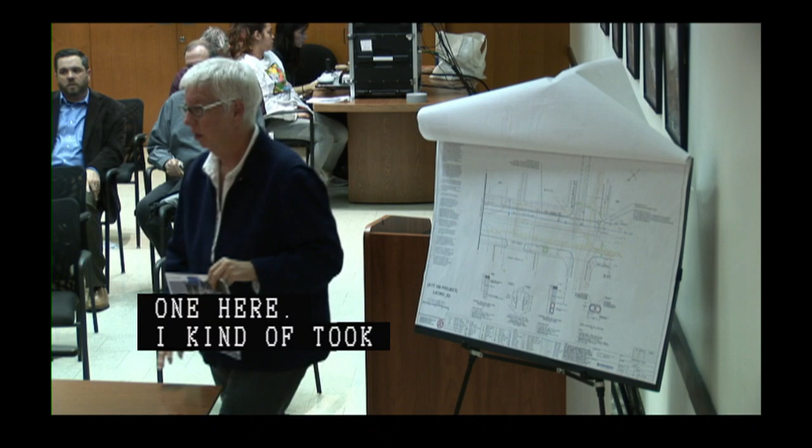Sure. I don't want us to be faulted in years to come. If someone is watching this conversation, there's no background, even though we are so used to seeing you on a regular basis. Just a couple of sentences as to why you are doing this. So you need to say, like, is it system upgrades or system expansion? Because in this isolation, some of these hearings will look really weird in years to come due to the sheer lack of information. I understand completely. A few words of context.

This is part of Crown Castle's backbone, so they need to connect two locations. On one end it's coming to a pole that will be aerial, and on this end here it's going to an electric manhole. They already have a network coming into that manhole, so this is just to make that additional connection. And the manhole is who?

Eversource. So okay, we'll go there. So these Eversource ducts are the ones which we changed electrical, right, the electrical ducts which we converted to the communications. We hope. Sorry, that's okay, just too many years of interesting work.

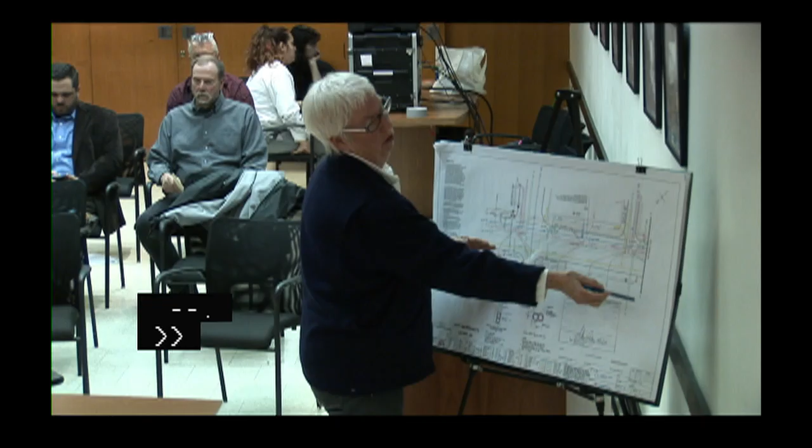So where is the aerial connection that's requiring us to go on the north side of the street? That's right, that's at that corner. Yeah, so we had to cross one way or the other. If we came down this side, we would have had to cross on the other side. It's a minor point, but you're crossing twice rather than once. Correct. No, we're only crossing once. This is on, right, so why not just go straight to the south?

I can answer that. We originally planned to go just straight down the south, and Boston Water and Sewer disapproved that, so we had to change it. That works.

The design for micro trenching, because I'm totally lost as to what you all are doing, and I freely admit it, because we have so many telecommunication companies coming. So your infrastructure, or whatever support infrastructure you are putting, does it require full conduits, because that requires a deeper cut, since it is the city's asset that is getting compromised? I have my personal thoughts as to whether what you all are doing is right, but the city asset keeps getting cut and cut. So we have a distinction between putting micro trenches, which is a smaller disruption, versus this full blown approach. So who makes the judgment call as to whether this be?

This is actually not a micro trench. We're still in our South Boston paving program, and we want them in a traditional trench, so that when we get to them, we're not at risk of cutting them up. We're working with Katie's team to define when and where micro trenching would be appropriate.

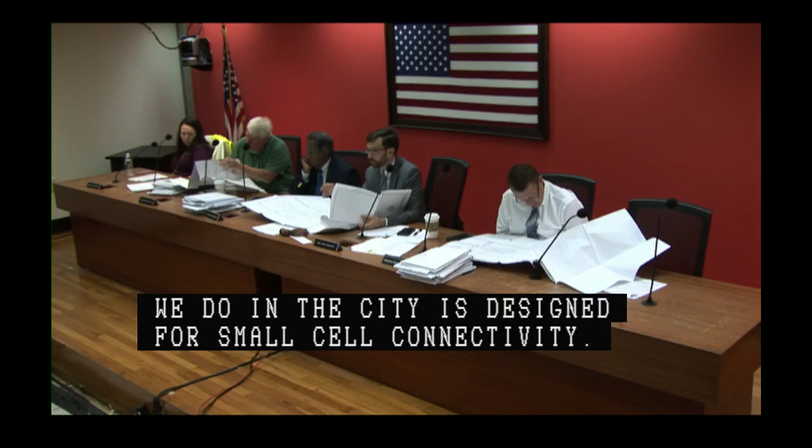And similar to - I forgot your name - but your comments before, is this also helping to connect essentially the Lightower and Crown Castle networks, or building some redundancy in the system? Or? Honestly, I wouldn't be able to talk about it. My colleague was working on it, so I'm not 100% sure. I appreciate that answer from you. Thank you, sir. Thank you.

So again, I have the same concern again. Bypassing numerous Eversource manholes, you're breaking out of manholes, going back into your own system, going back into the Eversource system. If you could get me the same documentation for basically the conduit lookup and availability. Additionally, I know over the last 5-6 years we've put numerous telecommunication lines in this street, so I'm just wondering why we aren't using that. There's got to be city shadow here.

Definitely got to be city shadow. Have you looked at that? We'll look into that. I know that we typically talk to Ed down in the basement for city shadow records. I'll do a little work on that to see what we found out in that regard, because this street has been dug up numerous times with telecommunications.

So, here you're not - correct me if I'm wrong - connecting to an asset on the street like a light pole. You're really just connecting 3 Eversource locations. Correct, that's the whole purpose of this project. I imagine there's probably some city shadow that would require part of that construction. We are installing city shadow with that, yeah.

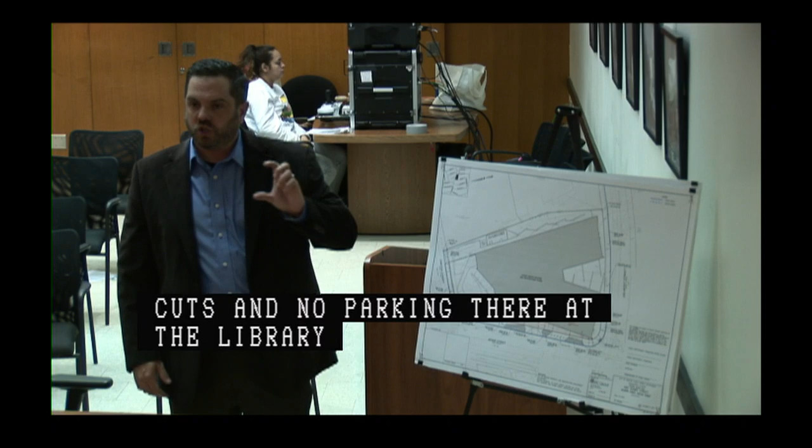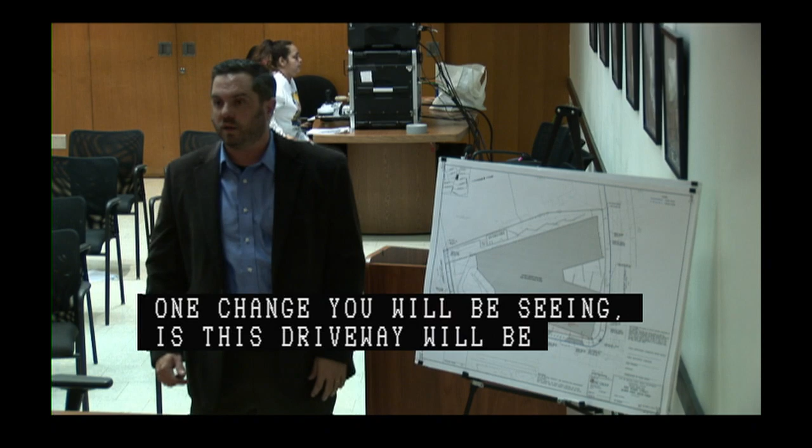One change you'll be seeing, requested by staff this week, is that this driveway is going to be combined with the Butters driveway curb cut into one larger curb cut, changing to narrower sidewalk tip-down curbs. It's a narrow sidewalk, and this eliminates that awkward, narrow, weird sidewalk section between two curb cuts. Working our way down, we're going to be replacing an apex ramp on the corner of Oakton and Adams with two new curb cut ramps and crosswalks.

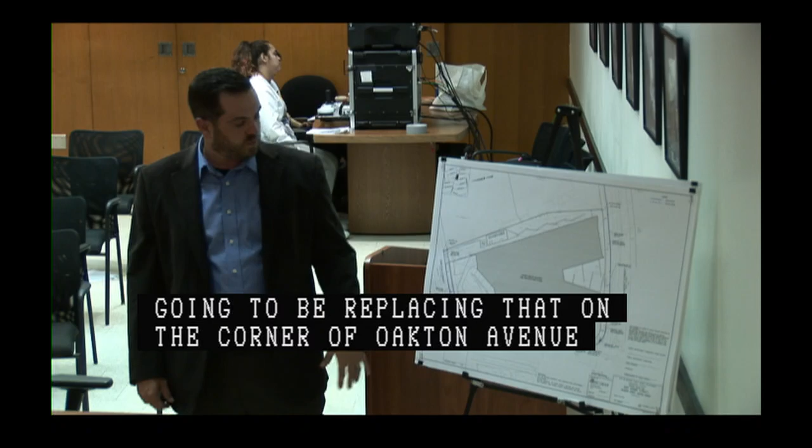On Adams Street there will be custom tree grates. Quick question about that corner—I assume it's a level landing issue, or why did we not square the crosswalk across Oakton to be in line with the line of travel?

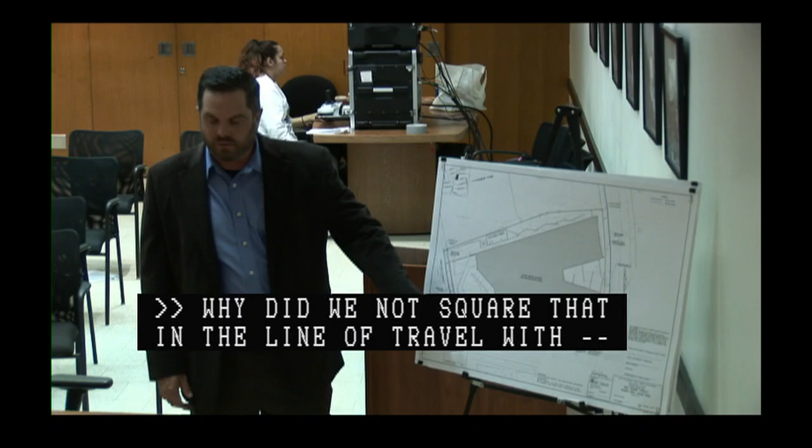So in order to eliminate the apex ramp, since it's a very narrow sidewalk, you end up having to swing it, and it is a level landing issue.

If you'd like, may I say something slightly... Sir, so good to see you. This library, during election times, do we use this library as a voting location? Yes, I believe they do. Yes, just for the record, I know the answer.

Yes, we do. So this location draws a fair amount of pedestrians, not just during library days but other days. And the chief's point about that crosswalk location—we sometimes place these crosswalks, due to design constraints, at a location where it doesn't get used when the crosswalks are not in line with the pedestrian path of travel.

Because I'm quite familiar with this location, could you take another step and see whether there are variances we can secure to at least give a ramp within that area, so the crosswalk lines up with people's path of travel? That's all I'm asking. Or alternatively, if you looked at a raised crosswalk, would that obviate the need for a level landing and allow a continuous path of travel on Adams Street?

I'm sorry, I couldn't hear you on that one. One potential alternative is looking at a raised crosswalk at that particular crossing—then you would not have the level landing constraint, which I think is why you...

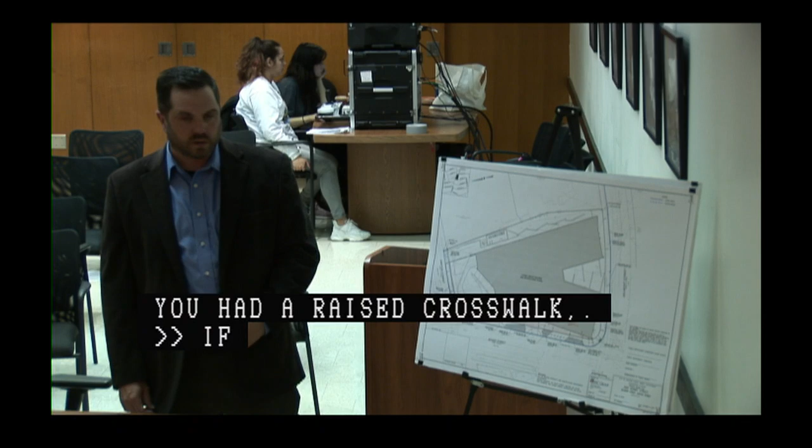If we had a raised crosswalk—may I say the following? Let's assume I'm feeling really bad and insist the crosswalk needs to be in line. Okay, so that's the ask. Yeah, so now you be a good engineer and sort it out. Yeah, and that's what I was saying, because I don't want us to do engineering over here. Yeah, we can certainly look at squaring it up more.

Do your thing. But right now, what you're proposing at a location with people in wheelchairs, elderly people, everyone who comes there as part of our civic society—that's not a good solution. Okay, then they question our judgment as to whether we know what we're doing. So help us on that front.

I'd also like to point out to the commission that there's an elementary school located behind this, which runs on Oakton and Delmont. That's a great point. All set on it.

Moving on to Adams, we're proposing custom tree grates with street trees, an accessible drop-off centered on the main entrance to the building, and custom bike racks. The bike racks would spell out the letters A-D-A-M-S.

Did you say the tree grates were custom? Yeah, they're a custom shape—as you can see, not rectangles. Oh, okay.

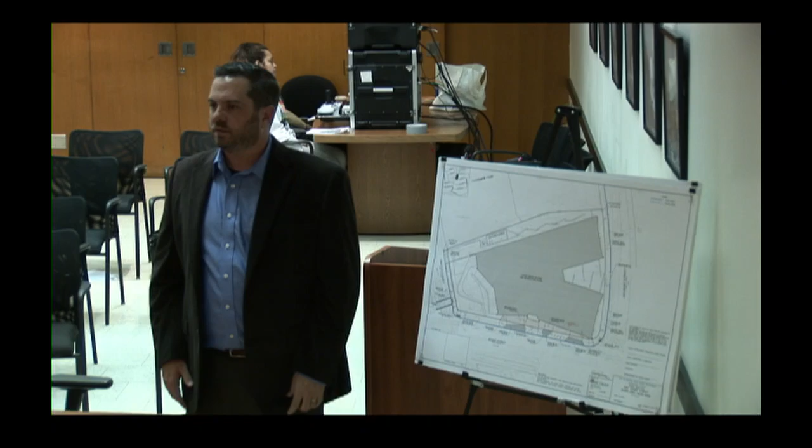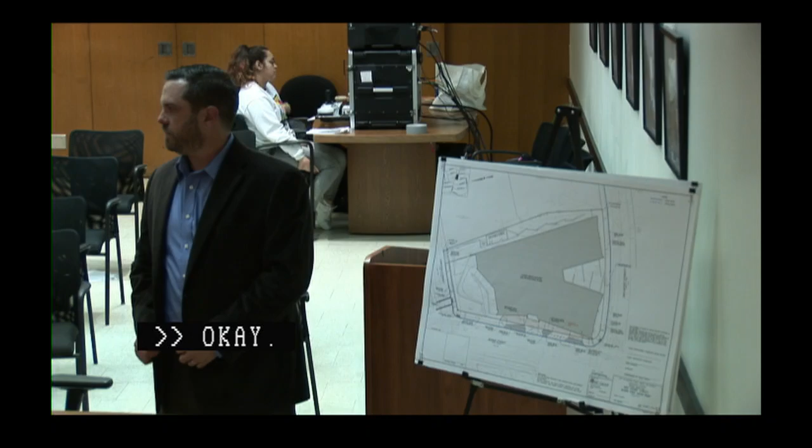They're interesting shapes, larger. It's like old days, because tree grates have a way of moving, trees have their way of moving. So you may want to keep it as standardized as possible because you will build it, the libraries will own this, maintain it, and it becomes a maintenance challenge for us to even replace an odd shape. So as much as we appreciate the architect's vision for uniqueness, balance that with the maintenance challenges we have, especially on a sidewalk with massive pedestrian traffic. We don't want to create tripping hazards in front of a library. So just give some thought to tree grates, because I've had real challenging problems with tree grates that were customized in very narrow sidewalks.

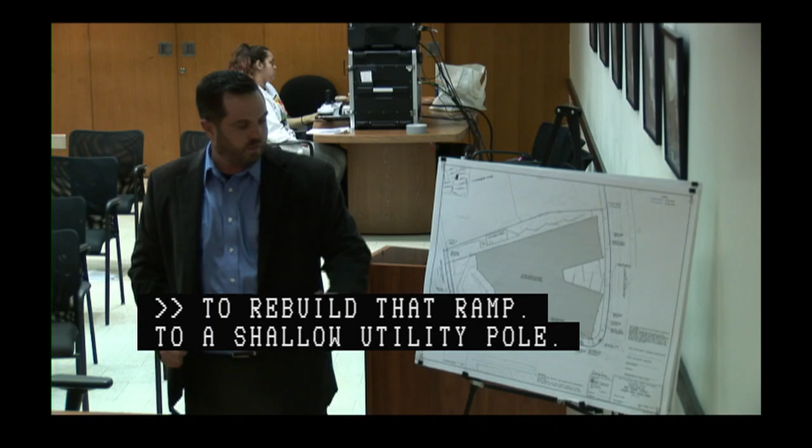As we continue to the corner of Delmont and Adams, there is an existing apex ramp. We're proposing to rebuild that ramp as is, primarily due to a shallow telecom manhole and a utility pole that would make what we have here that much worse at that corner, and it would skew the curb ramp significantly, particularly on Delmont. I think to Laura's point, if you can take a look at that intersection the same way we're looking at the Oakton intersection, that'd be helpful.

And then as we go around further, the last real element is there's an existing driveway curb cut on Delmont that we're going to be closing. It's not really used, and certainly won't be in the future.

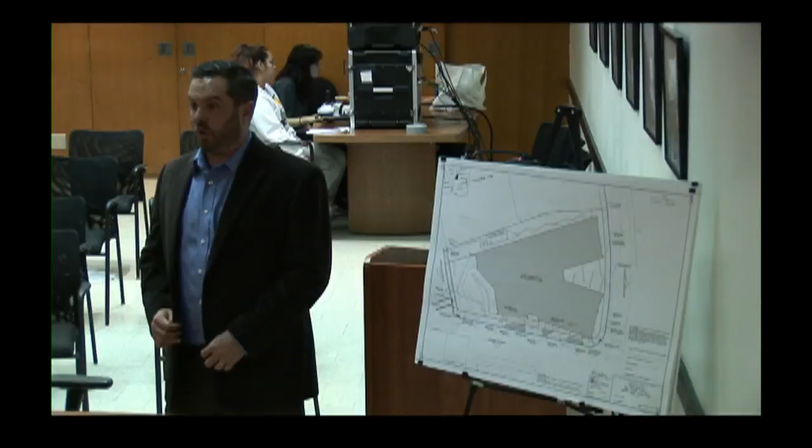Any other questions on the specific repairs? A minor thing, I think the bike racks are incredibly creative. If you could just run that by our active transportation team, just to make sure they have any suggested adjustments. But it looks really cool though.

It's so nice. Sorry, keep going, I didn't want to flip over.

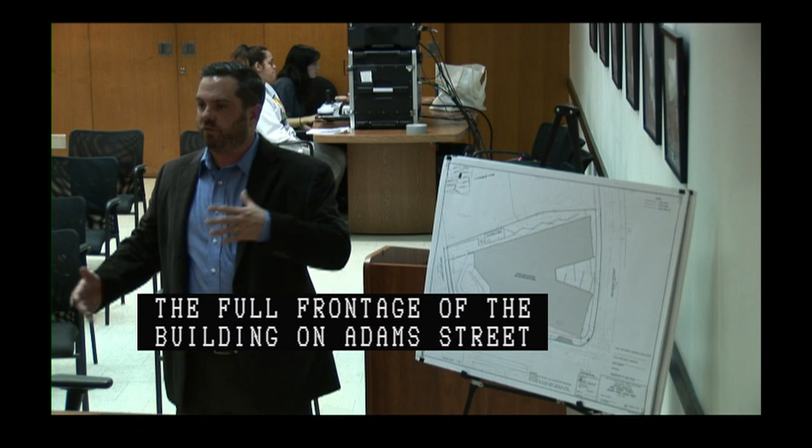Go for it. On the pedestrian easement side, it's basically just about the full frontage of the building on Adams Street, primarily to account for the tree grates and get the full width. This is all going to be cement concrete in front of the building to provide that full width for pedestrian access.

So you are accounting for the tree grate going out of whack to allow a pedestrian sidewalk. Yeah, if I remember right, the library will be responsible for the sidewalk and the tree grates. Is that an agreement? Yes. What's the reality of that, I mean that's us, right?

I mean, library meaning, this is public, BPL will be entering into a maintenance agreement for all of the specialty installations, including the bike racks, the tree grates, and the trees themselves. Even if it's the city, we need an agreement because Public Works is supposed to do it. Right, and we have not, correct me if I'm wrong, received the executed LMI for the Johnson building? We have not. Okay, our law department has been actively working with their law department to get that finalized.

Hopefully in two weeks. So this is more on the BPL side, but the execution of that, to Para's point, I think also helps us understand that this would be executed and maintained over time. Absolutely.